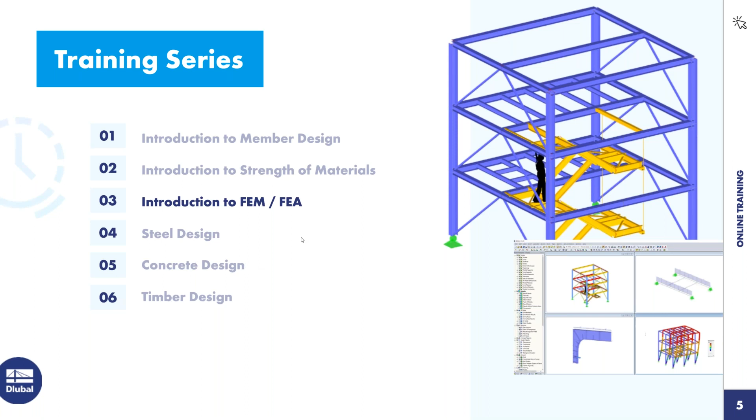We offer a plethora of webinars and training series for everyone. We are in our 3rd training series, and that is the Introduction to FEM - Finite Element Method, Finite Element Modeling, or Finite Element Analysis; there are many different explanations for the acronym. We've already had Introduction to Member Design and Strength of Materials, and then interesting topics are coming up: steel design, concrete design, and timber design.

Diving into a bit more detail of what we're going to look at today: the basic principles of finite element analysis, bridging the gap between the heavy technical things we learn at university, summarizing it and making it more understandable, and putting it into practical applications for what one has to consider when modeling in RFEM.

Then we will look at our first introductory example, which we can model together, and that is a continuous slab. We will look at different ways of modeling the slab and compare the results we get with what we expect from our basic principles of beam theory. Mentioning beam theory, we're also going to have a look at plate theory.

We'll then have a look at a couple of already predefined models, looking into nonlinear calculations, which won't require much following along. Afterwards, we'll end up looking at some singularities where everyone will be able to model along again.

So before we get into the basics of finite element analysis - we've already introduced ourselves - it might be nice to know a little bit more about where you guys come from. So I'm just going to start a poll, and you should see it now.

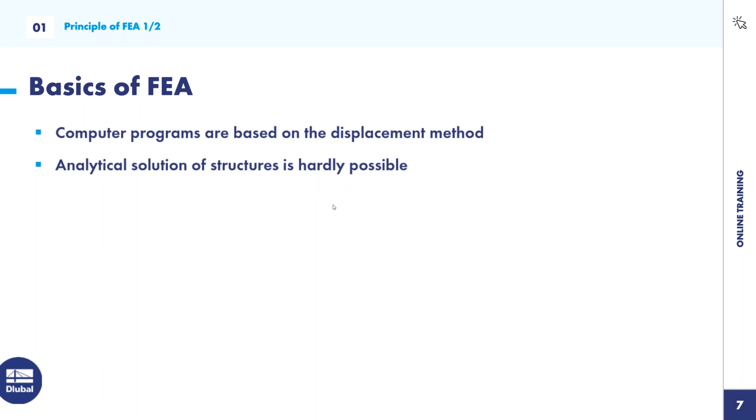Perfect. Thanks for that. So yeah, like I mentioned, we are based off the displacement method, which means we are solving for the unknown displacements, the deformations on the structure. From then to get the forces, it's a post-processing result. So that's how we get our stresses, our internal forces, etc. Our basic principles from what we learn at university, being analytical solutions, is quite hard when we extrapolate that onto bigger structures. And that's where we go into numerical solutions, and that's where the finite element analysis comes into play.

What we do is we take this real structure, a continuum, and we break it up into a mesh of finite elements. That's where the name comes from. And each of these elements are connected with one another. And it's that interconnection which is quite important, because when we come to assembling everything again, which is on the next slide, that's how we describe the structure as a whole and not just these individual pieces. The nodes are very important. All of our results are concentrated at the nodes, and then broadcasting that onto our whole problem is done through interpolation.

Mechanical behavior is described by approximation sets, and a very important part of the whole process is discretization. That's when we take the problem and break it up into smaller pieces, and we can describe the behavior of the smaller pieces quite accurately. Graphically, we start off with the structure as a whole, which might be quite challenging to describe. So then we cast a mesh over the entire structure, each mesh is the standard element, and we know the behavior of those elements. Then we transform the stiffness relations of each single element into the global picture, and that's how we can describe the whole structure. That's part of the assembly.

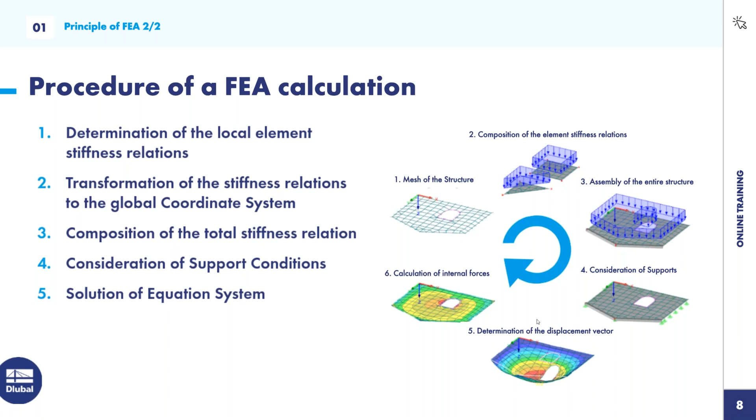The next step, which is very important, and that's quite often what happens when we have an error when running an analysis model, is getting the consideration of supports correct. Is our structure stable? Have we provided enough supports for the determination of the displacement vector to take place, which is what we call the solution of the equation system? And then as engineers, we want to work with bending moments, axial forces and stresses. To get there, it's part of the post-processing where we determine these forces, which is very useful when we come to designing.

That brings us to our first example, which is going to be a continuous beam or a continuous plate, a two-span beam or two-span plate. It's always better to learn through doing. In this example we want to cover the finite element mesh and the implications that the mesh size has on the convergence behavior of our results. We're going to be looking in detail at the hogging moments over the internal support. To validate our results, we'll look at what we expect, simplify it down to a single two-span beam, and look at how the different mesh sizes correlate and converge to what we deem to be the appropriate solution.

A few other things that we'll look at in RFEM is just how we can look at the distribution of internal forces. We'll then touch on the subject of shear stiffness and the consideration of shear stiffness when running analyses in RFEM 6. And then we can also look at result smoothing when it comes to interpreting the results a bit better. So I'm going to switch to RFEM now.

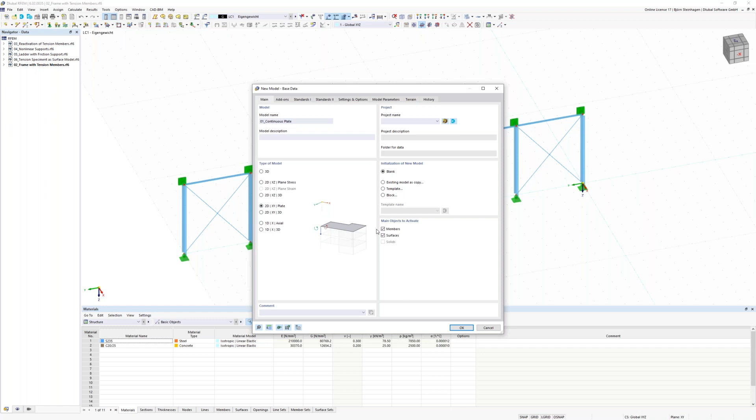So for the plate, we want to consider bending in both the X and the Y axis, and we will have deflections in the Z axis. So we're happy with this 2D XY plate. So I click on OK, and that will then generate a new model.

Since this is an international webinar, when it comes to language settings, we can go under options, program options, and under settings, you can have your language of choice. Also, when it comes to appearances, under display properties, you can toggle to a dark background if you'd like, but I prefer sticking to the white background. But again, it's just a matter of personal preference. So much for that.

So let's start off with modeling. What we want to define, going back to the presentation, is 4 surfaces. So we'll start off by just creating one surface and then copy them across. To do that quite simply, we can go up to new rectangular surface. And since we are in the structural engineering domain, we don't just look at geometry. Geometry has meaning to us, which means geometry has a depth, and that depth, that thickness, is assigned a material. And that's exactly what we want to do here.

So for this example, we're going to have a thickness of, let's say, 300 millimeters. So we will create a new thickness. And like I said, each thickness has a material, so we can go into the material library. As you can see, there's quite a few materials to choose from, which might be a bit overwhelming. One can also search, which makes things a bit easier. So I want to go for a concrete material, just normal grade concrete, not lightweight concrete, and double click on C30/37.

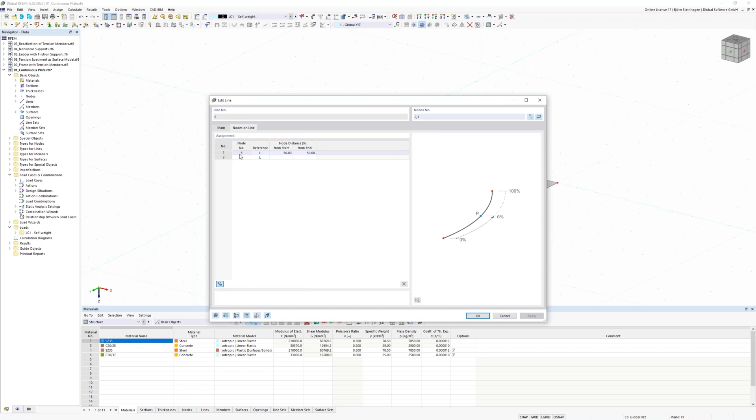And just to illustrate that further, if I now click on the line, it has a new tab called Nodes On Line. So it recognizes that node from the line that I just created, it belongs to it. So everything is nice and connected. The red nodes are just a standard node type. So there are different node types, and that's what the different colors mean.

We will now go on to supporting our structure. Obviously, no structure is complete without supports. So we'll start off on the left edge. And basically what we want is, like we know from our structural analysis lectures, we'll have a pin support here and then 2 roller supports on the interior support and on the far right. So there are lots of ways in RFEM to assign attributes. It can either be on this left navigation bar, it can be using these quick icons at the top, or by clicking on a line and right clicking for more options.

We'll start off with this option, assign line support, and a hinged support is what we want. So we want to assign that now to a line number. So we'll click on line number 1, click OK. Okay, and now we've assigned a line support to that first line. These 2 lines, we will have a roller support. So again, it's now realized that I've clicked on lines 3 and 5, and the line support type. The only 2 options we have here are hinged and rigid, and that's not what we want.

So we want to look at having a new line support. So I go create new line support. And there are some presets at the bottom. I can either define things manually, or I can use the preset, which is sliding in X, and it knows what to do. So I click OK, and OK again, and then now we have our supports.

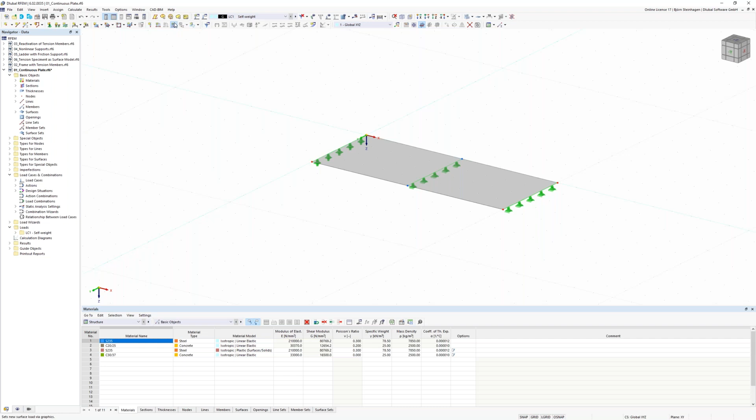I'll click OK. And now when it comes to assigning a surface load, you can just say new surface load, and we'll make it a magnitude of 10 kilonewtons per square meter. We want to assign it to our surface, which is surface number 1, and we click OK. And OK again, and then there we see our surface load. We can also adjust certain settings. If we don't like the size of it, you can right click on the load, make it smaller or bigger, depending on how you'd like to view the model.

For surfaces, an important consideration, as mentioned, and the aim of this example, is to look at the different mesh sizes and the influence that mesh size has on our results. If we didn't do anything with the mesh sizes, then the elements would take over a default mesh size, and we can see that by going under Calculate and under Mesh Settings. And this is, in general, what will be applied to a surface if we don't tell RFEM what to do.

We want to be a bit fancier in our example, and we will then assign different mesh sizes for the different plates that we create. So one way of doing that is under Types for Surfaces, Surface Mesh Refinements. We can right click and say New Surface Mesh Refinement. And in the PowerPoint, which I just showed, we had 4 different surfaces. So I will create 4 copies and assign different mesh sizes of 2 meters, 1 meter, 0.5, I think would be good, and 0.1.

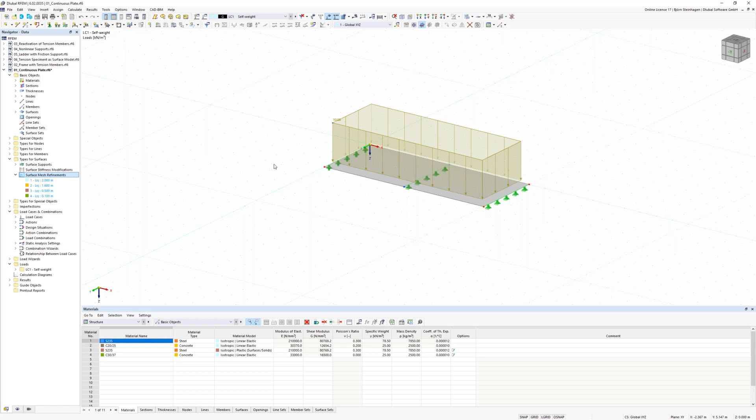Obviously, we need to create a copy of this plate before we can assign it to different surfaces. So that is quite easy to do. I just select everything. I go right click, copy, and we want to create 3 copies so that we have 4 in total, and that length is 10 meters. So I'll make a displacement vector of x is equal to 11 meters. So we have 1 meter between each model. I click on OK, and then there we can see our 4 different surfaces.

You'll also notice that it's now going out of the default grid plane. We can change that quite neatly by right-clicking on the canvas and going work plane, grid or snap, and we can make it dynamically adjust according to the size of our model.

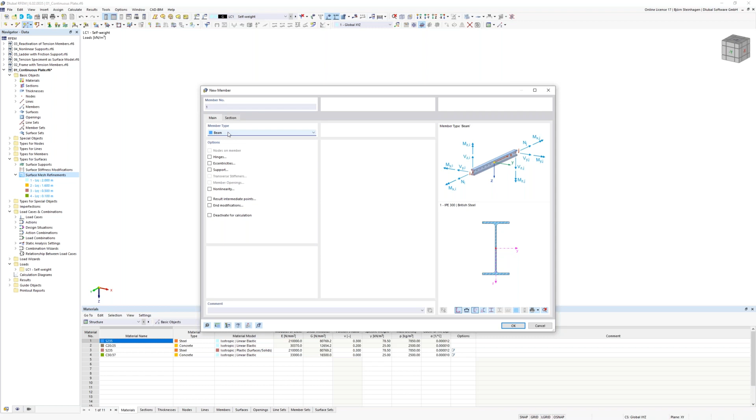Right, so we've created the copy, and now we want to also have a beam element for us to justify or quantify our results and to further analyze the convergence behavior. In order to do that, similar to how we created a new surface, we create a new beam member. So we don't need to change anything here. We just want to assign the section. The standard or the default is a steel section, and that's not what we will use for this example. We want to create a concrete member which resembles a meter strip of what we're doing with the surfaces.

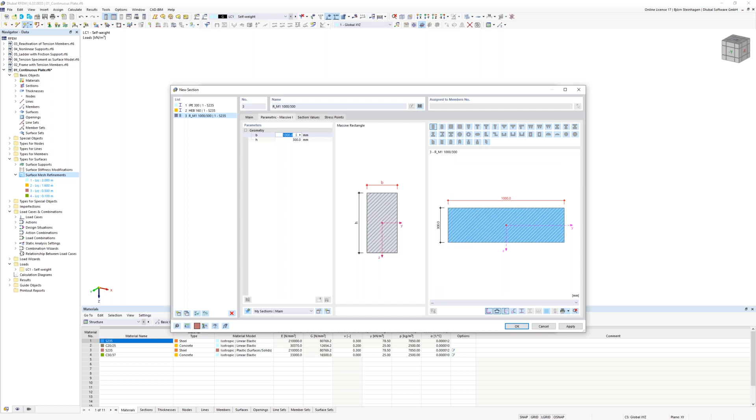So under the import section library, under the massive tab, we can just get a standard rectangle. The breadth, as I mentioned, we want to look at a meter width. So we assign the breadth of 1 meter, and the depth of our slab needs to be the same as the depth of the beam that we are modeling. So we'll make that 300 as well. Then the material should also be the same as what we're using for our surfaces. So we'll assign the C30/37. And I think that is all.

Yeah, so now we're ready to draw the beam. We can snap it to the middle, and the length should be 10 meters. And we can just do that by typing in 10, and you'll see on the member length dialog that adjusts accordingly. So there we have our reference beam element.

We can now look at the mesh assignments. It's a bit hard to see the meshes if we have the loads on, so we can deactivate the loads just by toggling off the show loads. Then going back into our mesh refinements, if I double click there, we can actually start giving it some values. The first mesh size is not assigned to a surface, and we want to assign that to our first surface. Click OK and click apply.

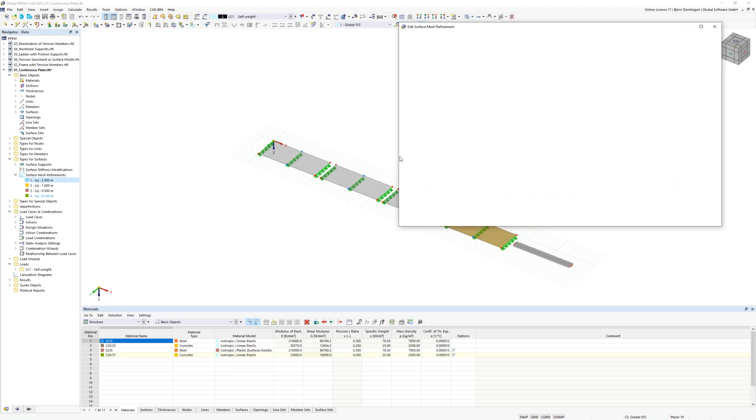Same for our second surface. And apply. And for our third as well. And we do the same for our last surface. So we don't see anything yet, which might be a little bit confusing. In order to see the different meshes, that is part of the calculation step of RFEM. So we can do that beforehand, and we can say generate mesh.

And here we can see our different meshes. So on the left, we have that mesh size of 2 meters, and that is very coarse. And then we have 1 meter, which looks a bit better, or was it 1.6, I think it was. Then 0.5, that's looking quite nice. And then we have a very fine mesh of 0.1.

We can see that. And then the final thing that we want to do is now we need to support our beam because this model will not run. As you know, as engineers, we need to add supports to make the model meaningful. So we will need nodal supports in this case. So I click on the node and I make it the same conditions as what I'm giving for the plate. So we have a hinged support on the left.

We need to now create a node in the middle, similarly to how we created a line for the surfaces. So in order to do that, I can right click on the member. And under members, I can say divide member by a number of intermediate nodes. We only want one intermediate node, and let's create the node without actually dividing the member. So I click on OK.

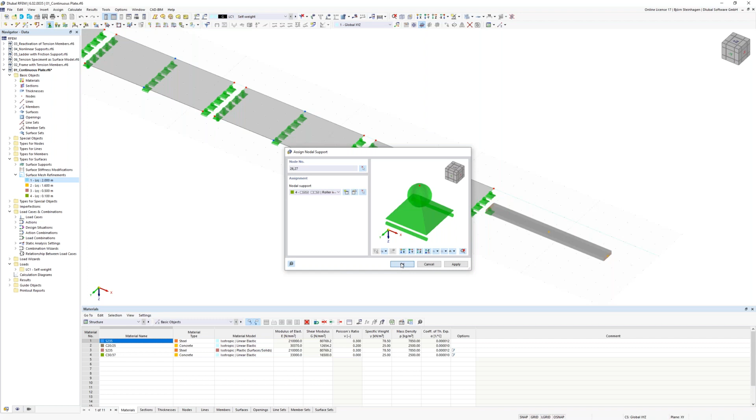And then there we have our intermediate node, and it'll have the same support conditions as the end node. So let me just select those and assign nodal support. And we want a roller in the X direction. Let's just have a look at how that is defined. Yeah, looks good. I click on OK and OK again. And then there we have our reference beam member.

What we'd also like is to apply the same loading that we have on our beam member as we have on our surfaces. So in order to do that, I go to assign member load or new member load, and we give it a magnitude of 10 kilonewtons per meter. We click on assign to members and we put that on that member. Click OK, OK again, and then there we have our member.

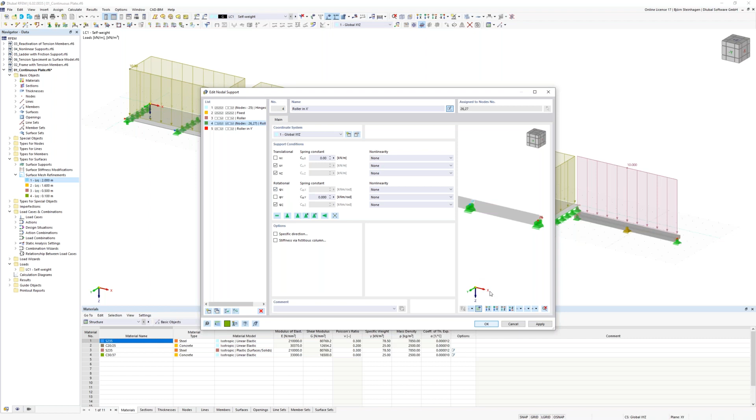Just going back to these support conditions, maybe it's just coming out of experience, but we would like to also make sure that the member is not free to rotate about its own axis. So we just make sure that the rotational restraint by X, so the rotation about its own axis, is restrained. Click on OK, and then there we have it. I think that is enough now to run some calculations. So under calculate, I go to calculate all. Let's see.

Before we go into the results, Ismail, do we have any open questions, or how's the pace for everyone? So far, so good, Björn. All questions are being taken care of.

I just wanted to name a few things, just so our audience can have a pretty good idea about how RFEM is different from the other competitors in the field of building information modeling. In this context, you were showing the surfaces, and just in case you did not take part in the other online trainings where we talk about the different features in RFEM, I just wanted you to show them how to render the surfaces as actual surfaces with their thickness, because it's all possible under the visibility navigator. What is it called again, Björn?

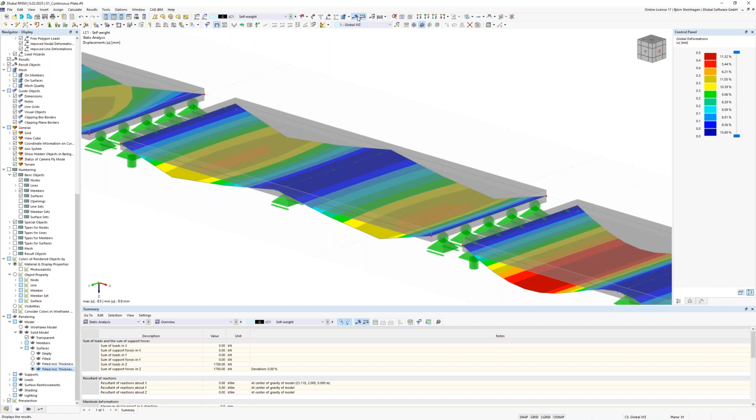The display navigator, and you can choose whether you want to see the surfaces including thickness or including lines and everything. It's a little bit down under rendering. There you go, rendering model, right under that one. You got rendering model, surfaces, solid model. Under solid model, you find surfaces, and you can choose whether you want to render it in a way that shows their thickness or not. So if you wondered why we are looking at surfaces that look like actual two-dimensional surfaces, no, they're not. It's just the way we render them, and that's one thing you can change whenever you want in RFEM.

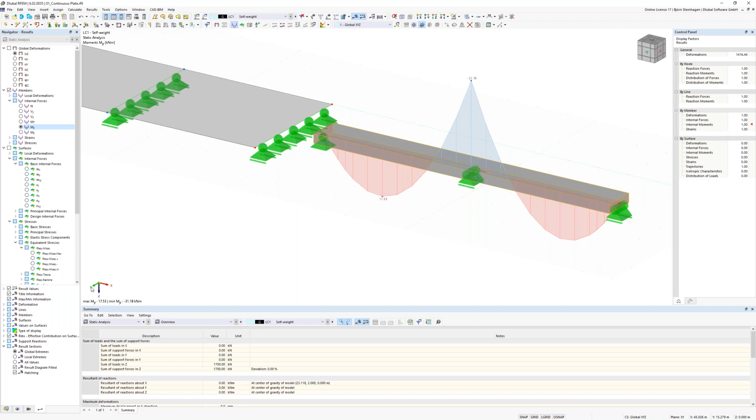So we can right click on the member and say local axis systems on, and we can see that green is for y, pointing that way. The support is hiding it a little bit, but it means we have the bending moment about the y-axis. It's just a coincidence that this matches the global axis right now - if I had drawn the member perpendicular, the local axis would point in the same direction as the global x. So it's always important to look at the local member axis when interpreting results.

Obviously this is quite a simple example, so we know that MY makes sense. For surfaces, it's a little bit different - it is not a bending about an axis, but along the axis. So for surfaces we want to look at our internal forces.

Now the contour plot might be a little bit hard to interpret. A very neat way to look at the results better is with a result section. We can draw a result section quite easily with 2 clicks - taking it from the middle of the surface and drawing it right across to the middle of the other end, then click OK. Now we have results we can compare quite nicely with our beam example.

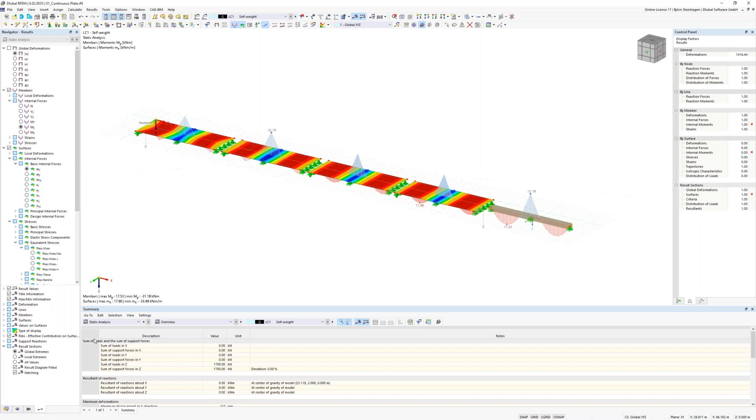I want to switch on local extremes, so it gives me all of the results. And here we can see a bit of a different behavior for the different members, for the different surfaces with different mesh sizes.

Going back to what we are wanting to expect, we wanted something along the lines of 31.18, and we see with the coarse mesh we start off at 26.38. Let me switch on the mesh sizes again and the loads. There we go. We see for coarse mesh we are probably underestimating it, and as the mesh gets finer, the closer we get to the reality of 31.18.

The take-home message here is you want your mesh to be as fine as necessary, but as rough as possible. If you have a very fine mesh, that has an influence on the computational time needed by RFEM. So again, we want it as fine as necessary, but not too fine - it must stay as rough as possible so we have that trade-off between computational efficiency and realistic results.

Again, finer mesh doesn't always lead to more accurate results. We also want to place our finite element nodes strategically, at points of extreme values or at design points.

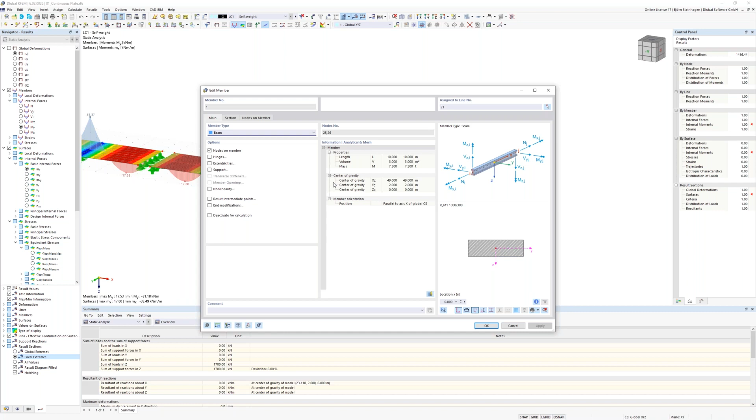So we can simulate that by going onto our section and edit section at member start. Here quite neatly we have an option to deactivate shear stiffness. So if I click on that and click OK, we need to run the results again. We click OK. Let me make sure self-weight is off, and just to make it run a bit quicker, I'll take off our design situations. I'll say OK, and calculate all.

We should expect a different value for our hogging moment now over the beam. And there we get 31.25. If we take 0.125 multiplied by our distributed load of 10 multiplied by 5 squared, we get 31.25. That's exactly what we see now for our beam after we've changed the settings of the member to not take into account shear stiffness.

Just jumping back to our presentation now. We've now run through this example. We have an understanding or a feel for how different mesh sizes affect the convergence behavior. We looked at the comparison between the beam and the surface elements, and we mentioned the shear stiffnesses.

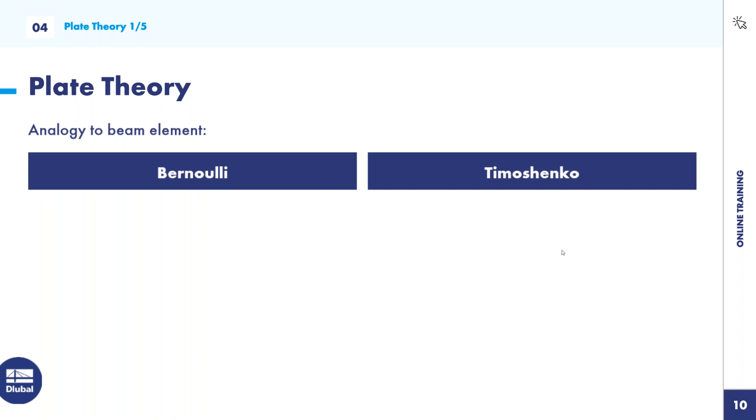Before we go into the plate theories and the different types of plate theories, we mentioned this with the Bernoulli beam. We have two types of beam theories or beam elements: the Bernoulli beam and the Timoshenko beam. I think we are very much comfortable with the Bernoulli beam. As we've all heard many times before, plane sections remain plane and the directors remain perpendicular to the member axis or the central axis. Because of that, we have no consideration of the shear deformations. There's a rigid shear stiffness.

On the other hand, the Timoshenko beam, otherwise known as the deep beam - we say the cross section remains plane, there's no distortion in that regard, but the directors do not remain perpendicular to the member axis, and we get this additional rotation, known as shear deformation. So here we have the consideration of shear deformations, and the shear stiffness is limited, which means it isn't rigid.

A little description of that: here we can see that these directors for the Bernoulli beam are initially perpendicular to that dotted line. With the deformation, it remains perpendicular. With the Timoshenko beam, the dotted line shows what the Bernoulli beam would do. Here we have something different, and we have this shear deformation.

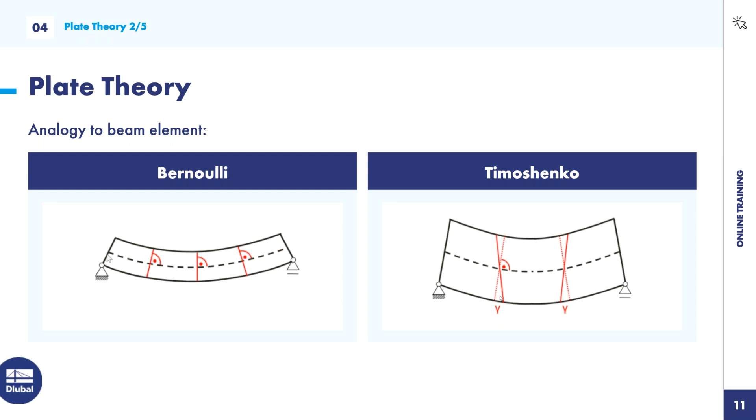That is then transferred to our beam theory, our plate theory. Plate theory was a further evolution of what was done for beam theory. The Kirchhoff plate is analogous to our Bernoulli beam. So we take on a certain number of assumptions: geometrically linear elastic material, cross sections remain flat, and we have no consideration of shear deformations.

The Reissner-Mindlin plate theory is equivalent to our Timoshenko, which is our deep beam. And here we have a consideration of the shear deformation.

Where do we see what happens in RFEM? Jumping back to RFEM, if I go on my data navigator on the left, it is part of our static analysis settings under geometrically linear. I go under edit. Under basic settings, I see that we have the plate bending theory of Reissner-Mindlin, which is equivalent to our Timoshenko beam theory.

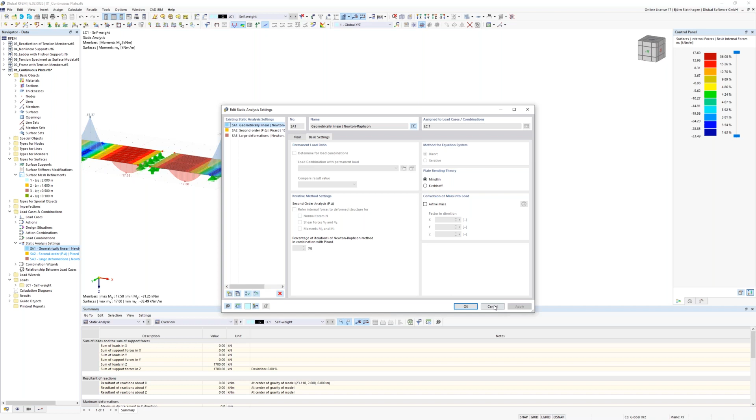I think that is enough before we have a short little break. But before we go into the break, I thought I would start a quick poll - just two questions, and this goes back to what we discussed about finite element analysis and finite element mesh. So the first question is, what is meant by discretization? Only one answer is correct.

Just waiting for a few others. Might close the poll. All right, everyone's making this look far too easy. Yeah, everyone got it correct - it is the decomposition into finite elements, correct.

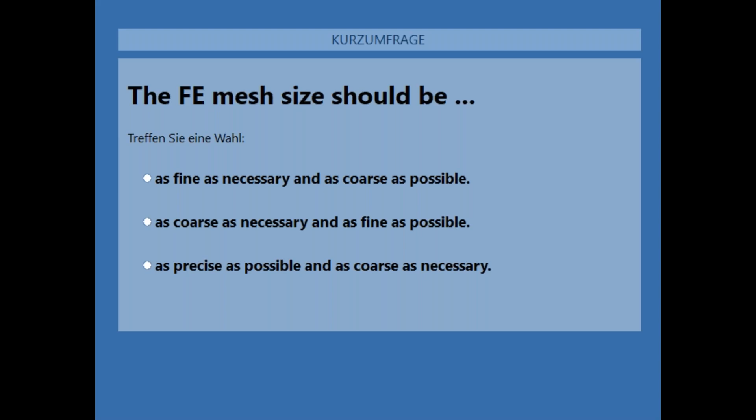I suppose the wording is a little bit trickier on this one. I'll just close the poll. So what we're looking for is that it should be as fine as necessary and as coarse as possible. Let me close that now. I should see my screen. Yep, sorry, let me go.

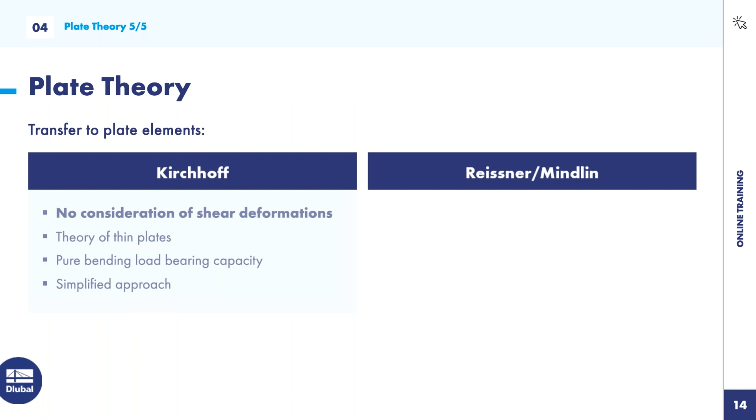I think we can go into a short 10-minute coffee break. Ismail, are there maybe any unanswered questions or any remarks from your side? You're doing it great, Björn. Everything's clear so far, and questions are being taken care of. I think we can go into the break. Awesome, so I have 10 to 5 my side. We'll be back at 5 o'clock, so in 10 minutes.

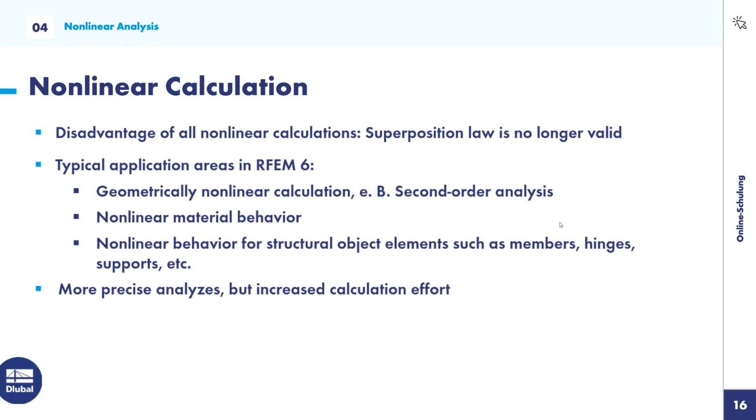Elements such as members, hinges, or supports—bracing jumps to mind when we talk about non-linear behavior of members, of elements. One can say it is a more precise analysis, but this comes with increased calculation effort. Again, it's up to our engineering judgment if we want to step into this non-linear world. There are places where there is no question, one has to do it, and that's where we'll go into some of these examples.

So I'll just close this continuous plate example, which we started with, and wait for that to close. Our first example is a frame with tension members. This is quite common in our steel structures—if you think of a steel hall or a storage facility, this is quite common. And just as a reminder, I think you guys can just follow along and watch, because I have these models already predefined, it would be quite hard to try and model along at the same time.

So if we can imagine a building bay out of a large steel structure, this needs some sort of lateral restraint. And if our given conditions are just pin supports at the bottom, our lateral loads could be something like wind. Wind can act in all directions, so when we're looking purely in our YZ plane, we'll have wind acting in our negative Y as well as in our positive Y.

This then, we're talking about the topics in lateral stability. So if I take away our bracing and we try and run this model, we should get an error, and we do. Some errors and warnings occur during the calculation. If we just click on OK, it will automatically jump to our errors and warnings box, and we can get a better idea of what went wrong.

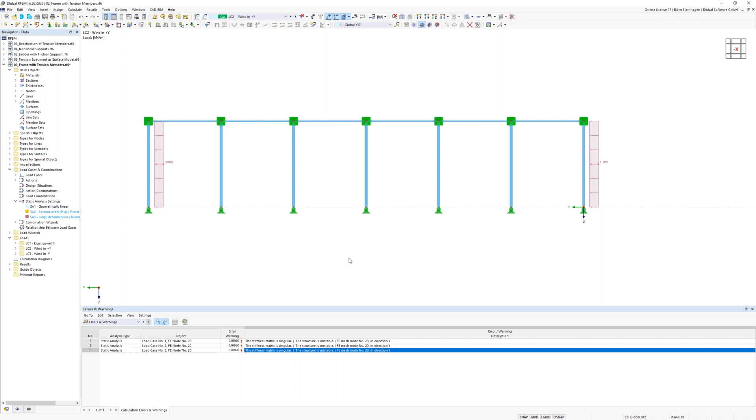The stiffness matrix is singular. It's something that you will get faced with, or happened to me quite a bit, is this error warning. And the first thing one should think about is always having a look at your support conditions as well as whether the structure is stable. And in this case, because I deleted the bracing members, the structure is not stable.

So how one can include bracing members is it is a type of member. Typically, when we talk about bracing, that could be equal angles or circular rods. I've predefined a rod here of diameter 20 millimeters. And we can draw that now. Let's not auto connect. So draw that from one node to the other. Yes. And from there to there.

Ismail did mention something earlier about the efforts with Dlubal and RFEM and how it's really taking on this idea of BIM and integrating a bit more parameterization and interoperability and ease of use in the graphic user interface. And one can see that with drag and drop, which is quite cool. If I select the two members, I can click and drag and drop. Sorry, I should hold control. Drag and drop. It's obviously not working now. As presenter, I can draw it manually.

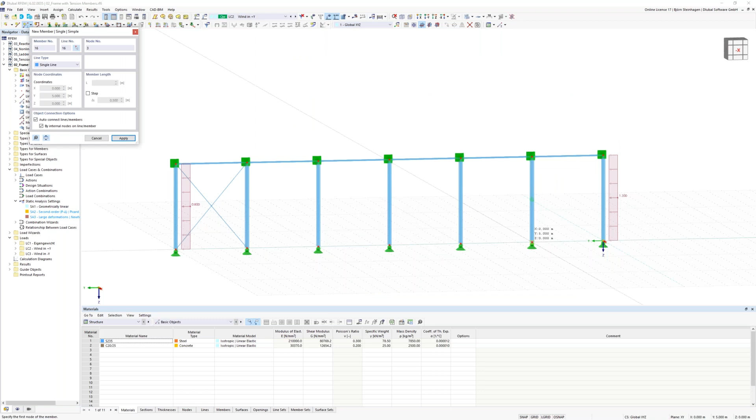So we get the section for a 20 millimeter diameter rod from node to node. Not auto connect. The reason why I say not auto connect is because with the intelligence of RFEM, it'll break up this member where it intersects with this rod and add a node there, which is usually very useful. But that's not what we want in this case, because in reality two rod members will run past each other. So that's why I deselected that option. So now we have our bracing members, and if I run this now, it should converge.

And it does. Now, just because it converges doesn't mean that everything's good. If we now switch off our global deformations and look at the behavior of our bracing rods, which you can think of as a wire, very good in tension but with almost no compressive resistance, and look at the axial forces, we'll see red for tension, and we'll have compression in the other rod, which is something that we don't want. This is an example of non-linearity, because we need to see how the structure behaves, and then the member type needs to react appropriately.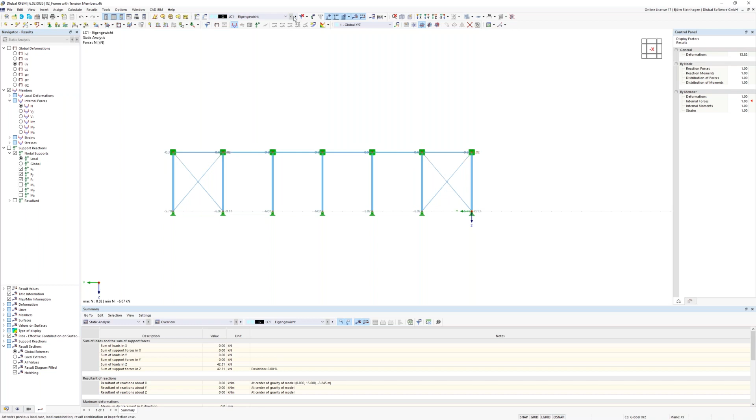So we don't want compression going into our bracing members, and there's a couple of ways that we can do that. Just for interest sake, if I toggle to wind in the other direction, we now have the reverse. So we have tension in that member, which means we need both members in our model, but defined in such a way that it is activated in tension and deactivated in compression. This is a type of nonlinearity which we can quite easily define. There are many different ways of defining it in RFEM.

So the first of which is I can select the 4 different members and double click on them, and say we want a nonlinearity. As soon as I click on nonlinearity, an extra tab pops up. There I have member nonlinearity options, such as failure under compression, and that's exactly what we want. This is the nice thing with RFEM, there's a lot of different presets. I won't go through all of them, but failure under compression fits our scenario perfectly. So we click on OK. Our definitions changed, so we must recalculate our model.

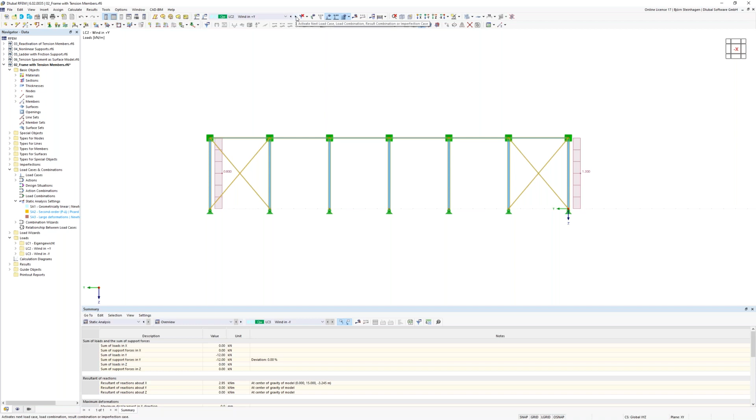So if I click on OK, and yes, I want to start the calculation, we'll see a difference in the axial forces of our members. And that's exactly what we want. Here we see wind acting in the negative y direction, so from left to right across the screen. And we see only tension, and this member has been deactivated. And we see the results for that load case.

We see the opposite. As I mentioned, there are many different ways that we can define this. So what we had was, let me select those bracing members. It is assigned to a member type beam, but there's a lot of flexibility and ease of use with RFEM. If I go on the drop-down menu, there are many different member types.

So it actually takes a lot of this clicking and nonlinearity defining work away from us, obviously in a good way. So we can change the member type to tension. And then you see the nonlinearity tab is grayed out because this is a preset, a default for bracing. And if I click on OK and run the analysis again, it'll give us the exact same results, but there are just many ways to achieve what you want to do in RFEM.

So again, the axial load is the same as what we had when we had defined it with a nonlinearity for a beam member. So much to that example. Ismail, are there any comments or questions after that one?

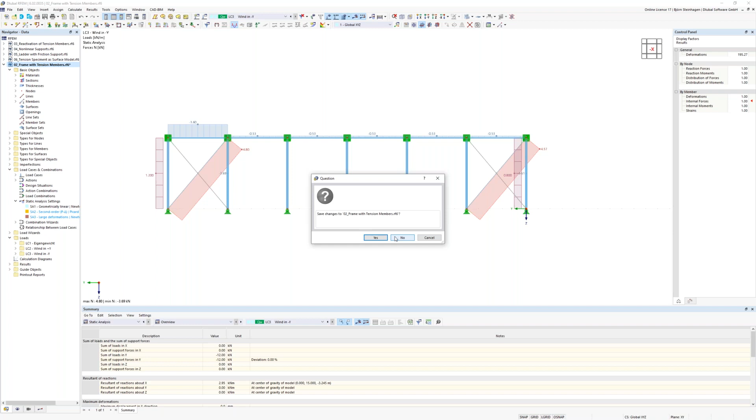Thanks for that, Ismail. Right, looking at our third example, similar to what we're doing in the second example with tension members, we're looking at the reactivation of bracing members. So once again, if I remove these elements and I try and run the model, irrespective of the nature of loading that we have, we need to have an adequately stable structure. So that includes proper support reactions defined, as well as a good structural concept.

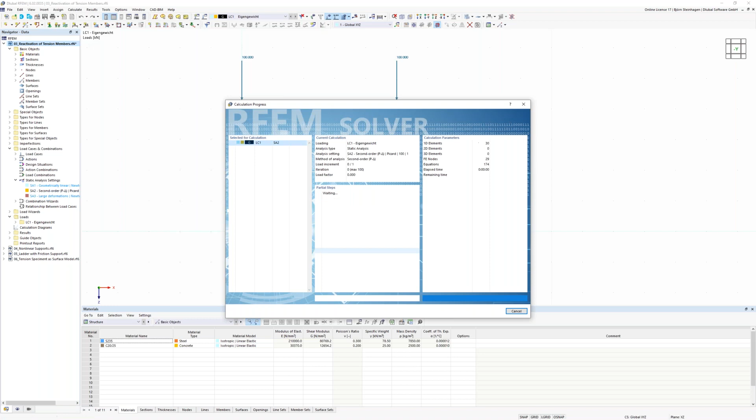Obviously we get the stiffness matrix singular issue, the structure is unstable. We get these types of examples from our statics lectures. So if I just undo that and I add the bracing back, we can now run this model. Again, stiffness matrix is singular, and that's because of the type of analysis settings we are now looking at. We are looking at a second order analysis, which is getting the equilibrium on the deformed configuration of the structure.

Reactivation is what is important to consider for this example. Let me close this and go back to our definition of the bracing member. We have a tension only member for our bracing. So we get this compressive axial load acting on our columns. They deflect accordingly and they shorten. When they shorten, these bracing members will shorten as well, meaning that they'll also be in compression. Because they're in compression, they will be deactivated, which means they will not be contributing to the stiffness of the structure. That's why we have this instability error.

There's a way to change the algorithm for the solving in the second order analysis, and that has to do with reactivation. Basically, reactivation will do the first iteration step. It won't ignore all of the members in tension. What it will actually do is take the tension member with the greatest compressive force, remove it, and keep the other member.

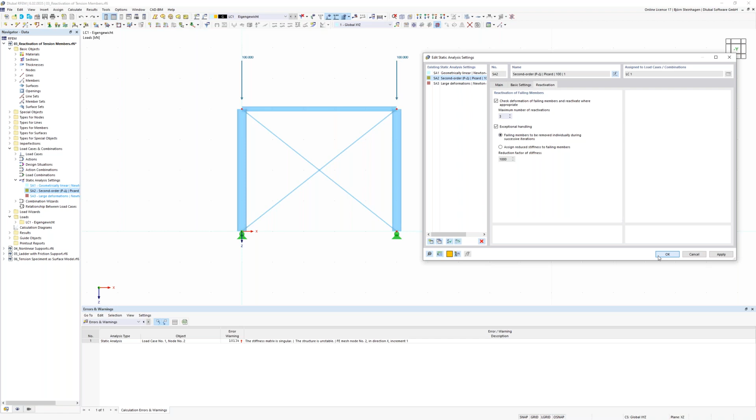So if I then say, check deformation of failing members and reactivate where appropriate, and we have exceptional handling for failing members to be removed individually. So the one with the highest compression force will be removed, but not all of them. If I accept these new analysis settings and calculate all, we now have convergence for the second order analysis. And we see that the member running from bottom left to top right is deactivated, where the other one has remained and is now in tension.

So much to that example. The next example has got to do with non-linear supports, which is quite interesting. So let me just close this.

So, quite an interesting example. We learn a lot of standard support types in our lectures. We have our fixed support, our roller, our pin support. Unfortunately, in practice, it's quite often not that simple.

Whatever it may be, strange requests from the architect or difficult building conditions, working on an existing site, you may not be able to get exactly what you want in terms of support conditions, and you have to adapt your model appropriately. So that's what we're looking at doing here.

Let's consider that we have this L-shaped steel structure, and the support conditions here are such that there's maybe a wall that the member butts up against, and it is resting maybe on a smooth surface. Let's say, for argument's sake, that there's little to no coefficient of friction that that smooth surface provides.

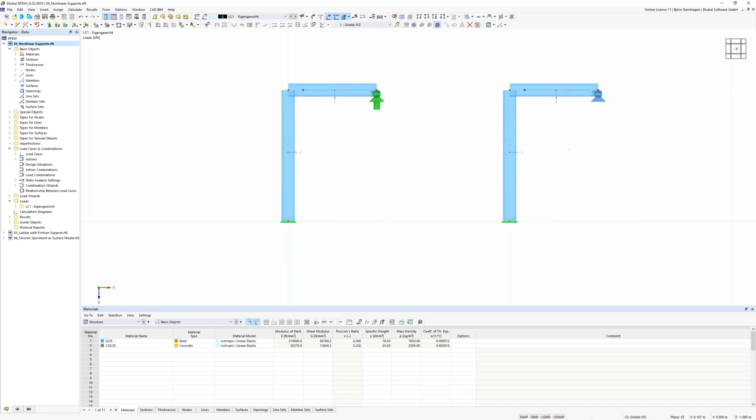It might sound a little bit complicated to try and model that interactively, but that's where RFEM has got some very nice and easy to use definitions. So we can see I've applied a load from right to left, which means that the structure should slide, and that is what is done if we don't have this flexibility in support conditions.

And if I open up this nodal support, which is theoretically our behavior on site, we can see a nonlinearity function for translation in the X direction. And that is failure if the applied load is in the negative X direction.

And that again is a nice thing with RFEM. There are so many easy to use presets that one can just pick, and one can also define things manually if one wants to. So I'm happy with that, because this model has already been created. And just to show the difference in behavior, we have global deformations for the structure on the right that is deflecting, whereas the one on the left is not at all.

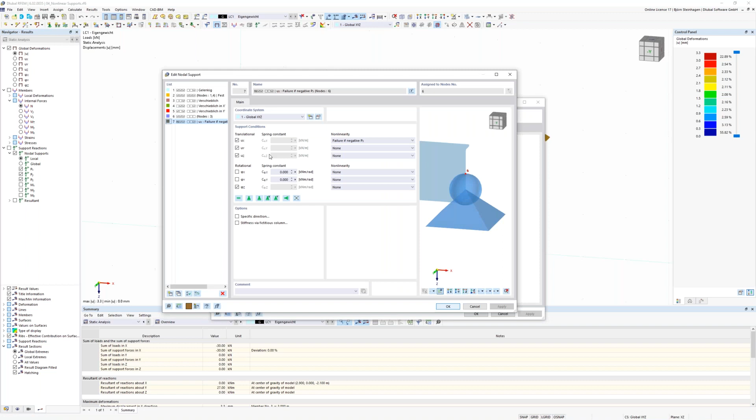And this type of support condition, which we saw when activating the properties, is defined as a nonlinearity. And it is exactly that, because we need to first see how the structure responds before we can apply these adapted boundary conditions. So much for that example.

Ismail, any comments or further questions or something in the chat? I'm just enjoying how perfectly clear you're making this look. Yeah, no questions so far. Cool.

Well, if you enjoyed those examples, hopefully you'll enjoy this next one. It's quite an interesting one. Consider we have a ladder that is propped up against a wall. Anyone who's worked on a ladder before knows that you basically prop the ladder up against something, and you usually get someone to support it at the base so it doesn't slip out from underneath you. We can actually model that with appropriate support conditions.

So we can see this 1 kilonewton load applied in the center of these ladder rungs, and we can define it such that the person is moving up the ladder, which is quite cool. Sorry, getting distracted by the little animation. That is cool, you're right.

Thank you. So what we want to see is at which point, if any, the ladder is going to slip out from underneath you, assuming a 1 kilonewton load. So it's a decent sized human, and we can look at our support conditions now for that.

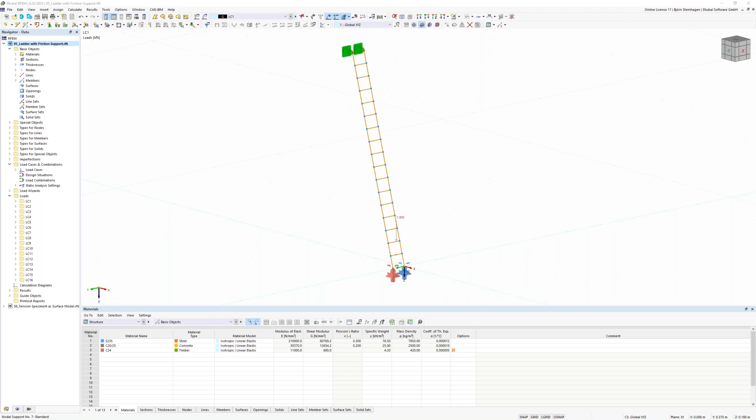So if I double click here and open up the properties again, we have a nonlinearity in the X and Y direction. It should be clear that in the Z direction, we're always going to get a support reaction. It's just what is applied down will be what is going up.

But for the X and Y directions, we have this friction, and the friction is a nonlinearity. So if I have none, then you'll see the UX tab disappear. But if I say friction PZ, we then get a UX friction PZ tab. So if I look here, there's only one input, which is a friction coefficient of 0.2.

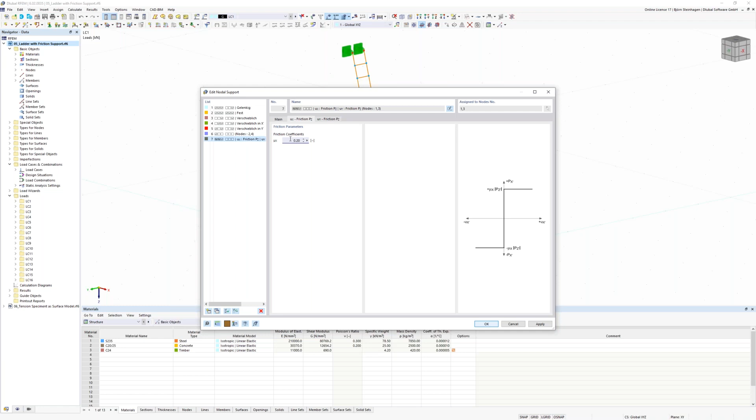Now, as we know from our first introduction lectures in physics, we take a coefficient of friction, we multiply that by a normal force acting perpendicular to the surface, and that's the drag that you'll get, and that's what we want to consider in this example. So we can straight off the bat say that we have a friction coefficient of 0.2.

If our applied force is such that this coefficient of friction is maximally utilized, then the ladder will slide. So if I bring up a view like that, we can see that that force is acting vertically down, but it's traveling down to the base through this inclined ladder, which means it's acting at an angle. And obviously our reaction forces now will be resolved into X and Z components.

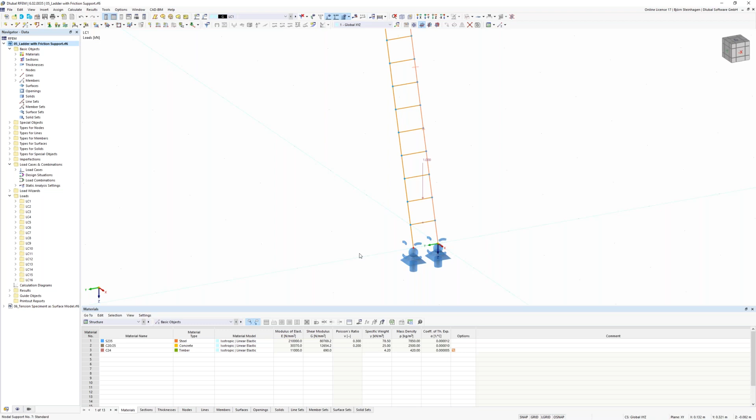So basically, if we take 1 kilonewton, it's applied centrally on the ladder. So in each beam, I'm not sure what the technical term is for a ladder, but each side of the ladder will be 0.5 kilonewtons as a vertical reaction, just from simple statics. Now, if we take the 0.5 and we multiply that by a coefficient of friction of 0.2, the maximum resistance that this configuration can provide is 0.1 kilonewtons, if I'm not mistaken. So let's just remember 0.1 kilonewtons in the back of our mind.

And if I now calculate this situation, we get some errors, which means that somewhere the ladder is going to slide away from underneath us. So let's have a look at where that occurs. Here you'll see the vertical reactions, and that can be activated. It is already done now, but it's under your results navigator, support reactions. And here let's just have a look at X and Z, so taking off Y.

And so we have, when the person steps on the ladder in the first rung, a horizontal reaction of 0.01, so nowhere near the maximum resistance that our setup can provide. We start moving up the ladder, and it's starting to increase, 0.06, 0.08, 0.09, and then that's our 0.1, which is our limit value, and you can see the ladder now slides away.

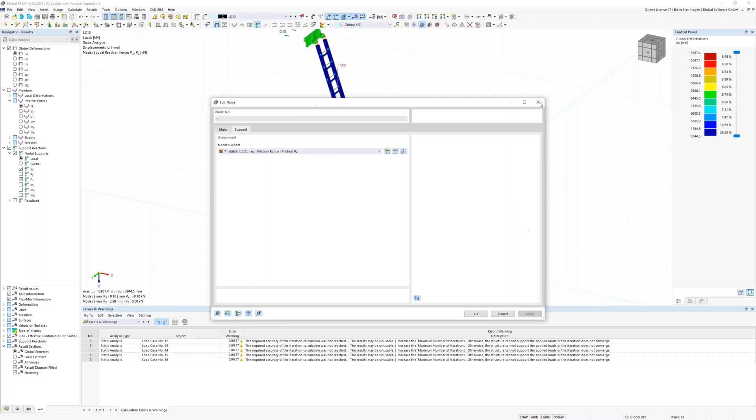I think it was quite a complicated example if you think about it, but with RFEM 6 it's quite easy to define. As you can see, for the support reactions, for this complex non-linearity, it's just one box which one needs to define. So much to that example. We can now move on to...

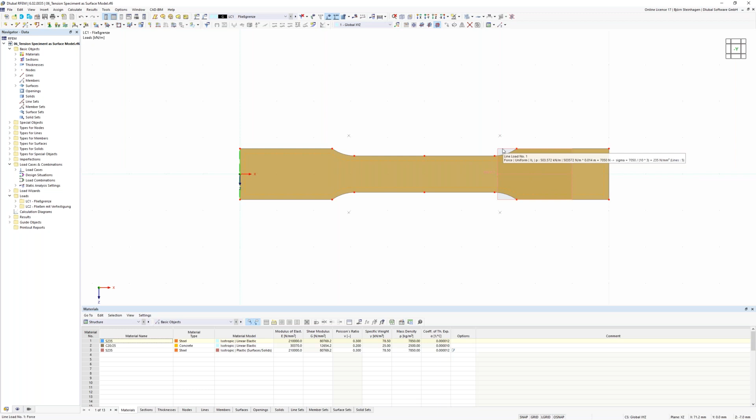If we want to look at that, we have here a wishbone type steel surface predefined, and we have a line load applied to the end. If I just zoom around a little bit, you'll see fixed supports there. So we expect that the structure is going to deform to the right. We have applied a load of 503.572 kilonewton per meter, which is probably at face value quite a strange number for me to input, but we have some method to the madness, and that is that, starting from right to left, it's basically solving for the force required in order to achieve yield on this surface.

So we're using a steel material with a yield strength of 235 MPa, or newtons per millimeter squared. Obviously, with our basic formula of stress is equal to force over area, we can calculate the required force by taking this yield stress and multiplying it by the area. So the question is, what area do we want to use? We want to get yielding across this smaller section.

So the dimension from that node, which is at 50 millimeters, to that node, which is also at 50. Sorry, we should be looking at the Z, my bad. So 5 millimeters at the Z and -5 at that Z. So the distance between those two is 10 millimeters. We've also defined a linear elastic material, and 3 millimeters is the thickness of that plate.

So going back to this, in order to calculate the force required, we take the 235 MPa, multiply that by 10 times 3, and we get that 7,050. We then want to distribute that over the width of our surface at this point, preferably not a concentrated point load. We'll get into that in the next portion, which is on singularities.

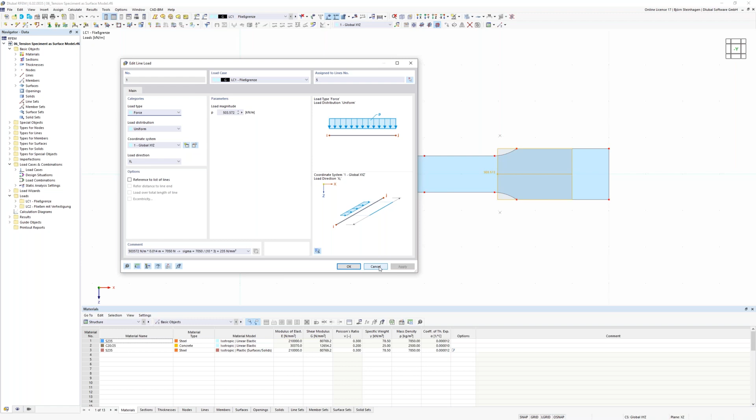503.572 kilonewtons per meter. As I mentioned, we're starting off with an isotropic linear elastic material. So we are assuming that we are still in the elastic portion, in elastic analysis, where the material conforms to Hooke's law. So just checking some things here. Yep, that's all good. So let's calculate all.

Right. So what do we see? What we usually get as default is the global deformations, which I mentioned. I'm not terribly interested in that for the meantime. I want to have a look at the stresses because we've applied a force which should backtrack to our theoretical yield stress. So under surfaces, under stresses, we have an equivalent stress formulation, where I've chosen the von Mises stress combination. That is a very typical stress combination to use.

It's basically the way you're getting a single value for stress, but stress acts in the principal directions. So how do you combine that to have a design value? Von Mises has a formula, and that is what we're using at the moment. So maximum von Mises stress. The contour plot I clicked on the bottom here, surface results. That is automatically generated between your minimum value and your maximum value.

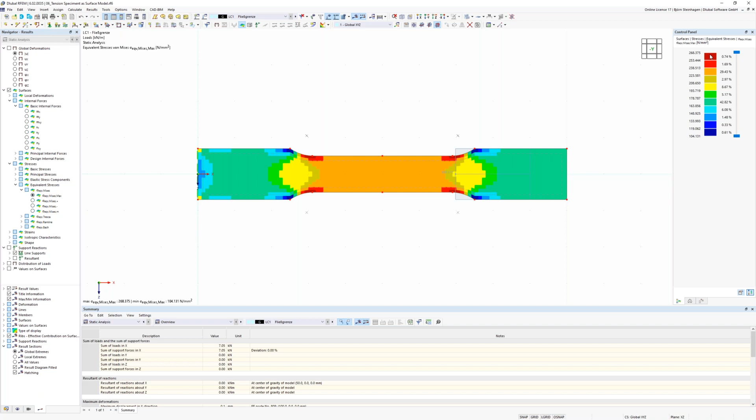So if you want to have a bit more control over what is happening, just first comment, we see that we get a maximum stress of 268 MPa, which is not what we expect, because we back calculated that it would reach yield stress across this portion, and we're getting something much higher than that. So if I double click on the contour plot and I limit it to 235 and I click OK, we get this arguably strange result on our surface plot.

What we do know and what we can say at face value is that we've now gone into the non-linear space. So we need to change our material appropriately to reflect that. One thing to mention on that point is that material nonlinearity is an add-on for RFEM 6. So if I right-click on my model and I go to base data, and on add-ons, we have this analysis add-on for nonlinear material behavior.

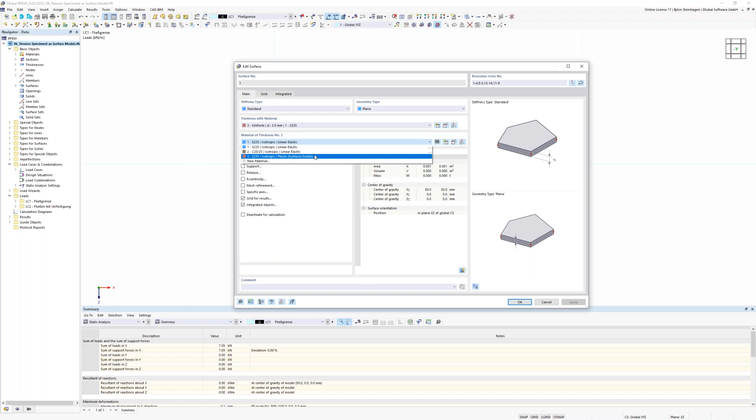I already have that checked, which means that, let me just deactivate results, when I open up my different material options, I have an isotropic plastic material. So plastic meaning we're now going beyond the linear assumptions. So isotropic plastic. And if I go into edit material just to look at what's happening, that material model has been chosen, and that is available to me now because I've activated that add-on for nonlinear material behavior.

Again, a lot of very handy presets that I can pick from, but isotropic plastic surface, that is perfect for my example. As I mentioned, we're looking at the von Mises stress, modulus of elasticity according to steel, and the yield strength for our material, which is the same as in compression and tension, has been selected.

So now we've changed the material model to represent our nonlinearity. Because we've changed our material, obviously the previous results don't apply anymore, which is that error that I got, or that pop-up that I just got now.

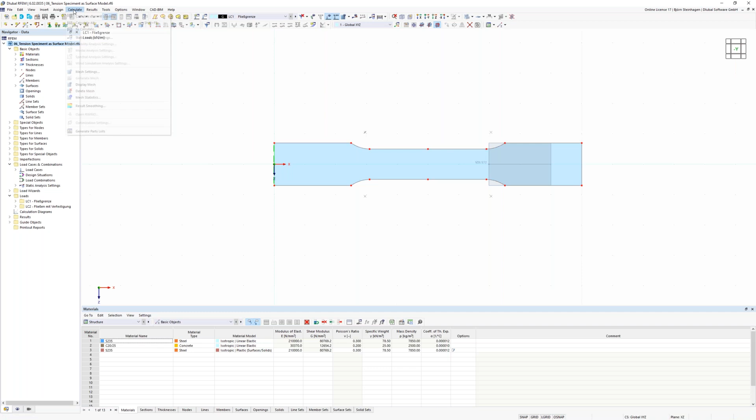So if I now go under calculate all with this non-linear material model, we see first of all that the convergence diagram looked a bit different. And we now have a maximum - sorry, let me now go on to maximum. I've not constrained the contour limits. I've said that it must tell me what the maximum and minimum stresses are in my model, and it is exactly 235.

Just a few remarks with regards to visualizing the equivalent stresses. You see it looks a bit pixelated. That has all got to do with how you want to view the results. So if I go under calculate, under results smoothing, we have different options. I think the standard is usually continuous within surface sets.

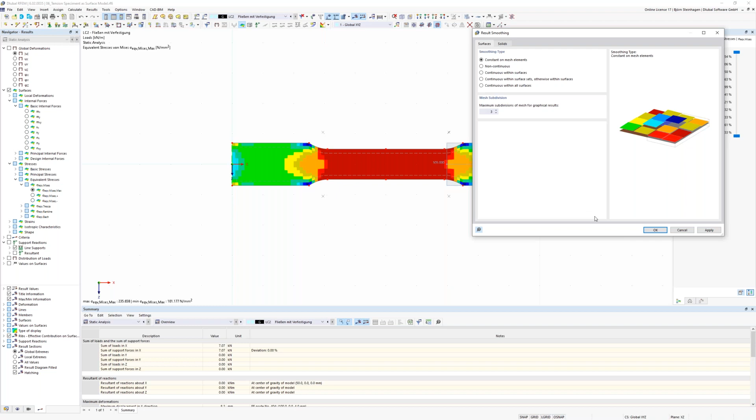So if you're looking over a very large domain, such as a large slab within a high-rise building, you might want to consider using that, where it will almost consider what is happening at neighboring surface elements and smooth it accordingly. But we're looking very detailed at a very small model - it's a 3 millimeter thick steel element, 10 millimeters width across there. So I really wanted to have a look at each individual surface result per element, which is also coming back to the mesh, how fine we have the mesh. So that's just a word to that.

Another thing to have a look at is if I look at my UX displacements and play the deflection shape, it gives a handy little animation to what is going on. And I can change that also for at the yield strength, and that's for uX and uY. Just switch off the results for the time being.

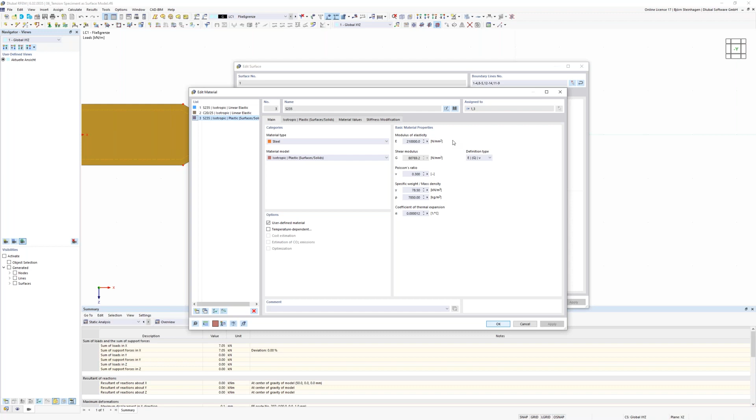There we go, just having a look again at the definition of our material. We have all of that, and that is the 235 MPa is what is reflected when we ran the nonlinearity, and that's what we want.

Ismail, any questions at that stage? No questions, but just one thing that I want to mention.

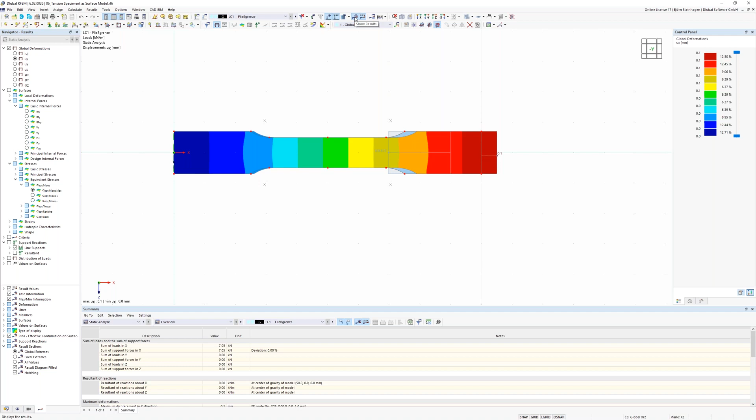What I personally love about RFEM are those little explanations next to each and every option you choose. If you go back to the window you just closed, it's just I think it's a privilege - I don't remember which one, but it's a general thing in RFEM. Each and every thing you apply to your structure, or you choose in those windows you use every once in a while in RFEM, you always have this little explanation on the side that tells you briefly what's everything about that you're about to do. So this is one thing that maybe some people might take for granted, but this is one thing that makes RFEM one of the most user-friendly softwares, because we actually care about providing a little explanation to those who are not sure whether that's the correct choice to make. So yeah, just a small remark.

Yeah, I've also found that very useful when also defining different standard types, so surfaces or beams, especially if I have a quick example with a beam member. A lot of these things as well - I'm not sure if that's what you're also referring to, Ismail - but if I go and toggle between the different members, it shows me the degrees of freedom. It shows me what axial load it's going to allow into the different member types, and that can be very helpful. Absolutely, yeah.

I think those are the nonlinearity examples that I brought along. We will then, as mentioned, go into singularities. But before we go into that, I thought I'd start another quick poll.

So the first question is, many answers can apply, and that is: which examples would be appropriate for a non-linearity calculation? Many, as mentioned, it's not just one answer that applies, there may be more.

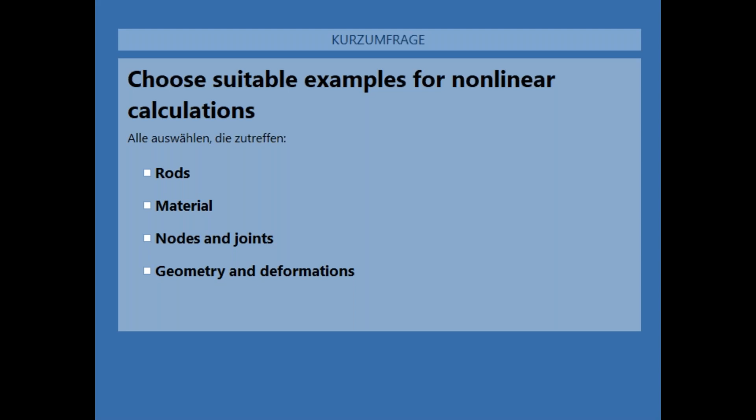Very, very good video, I can also recommend it. Thanks for mentioning that as well. Thank you, Björn. I think everyone's had enough time.

If I bring up the results, all scenarios actually apply for a nonlinear calculation. So you can have nonlinear material behavior, geometric nonlinear response, or nonlinear deformations. Rods, we mentioned earlier near the beginning with the different examples, where we had tension-only bracing members, as well as nodes and joints. For nodes, we looked at sliding and friction support conditions. So all of these options can apply in a nonlinearity scenario.

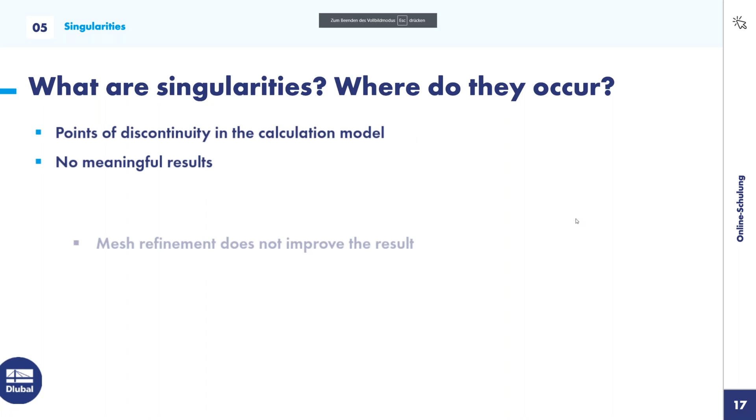Singularities, as I mentioned—jumping back to the presentation. So what are singularities? Where do they occur, and how do we go about not having them in our model? A singularity is a point of discontinuity in our calculation model. We can say, if we've identified it correctly, that it doesn't have a meaningful result. Just because we have an unfavorable result in our model doesn't mean it's not meaningful.

But if we've correctly identified a point of singularity, then yes, that is a result which is not meaningful. It is a model problem. Going back to what Ismail said, it's not a real occurrence—that doesn't happen in nature. It just has to do with the way we're modeling. It's also not an error in the software—it's just the incompatibility of certain conditions. Typically, we say a point of discontinuity is a point with infinite stresses and, conversely, internal forces.

Mesh refinement does not improve the result—this is a very important point to emphasize. In our first example, we changed the mesh size, made it finer and finer, and that refinement approached our expected result. Quite often people conclude that it doesn't matter, that making the mesh as fine as possible will always give correct results. That's where engineering judgment comes into play—it's not always the case. If you have a singularity in your model, mesh refinement will actually make the situation worse.

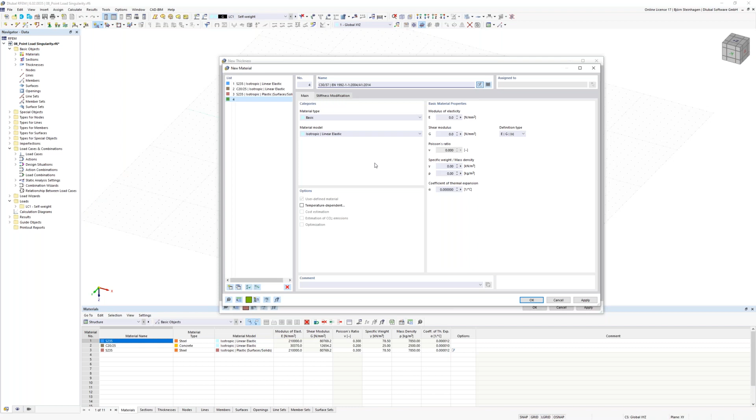The material I want to assign is concrete of grade 30, or C30/37. That isn't here, so I go to new material. It opens up the material library. I can filter by region, filter by material, search for the material, or I can quickly just search right here. If I type in C30/37, according to European standards, I can click on that and we have it defined. I click OK. So we have C30/37, thickness of 200 millimeters, exactly what I wanted for this example.

Click on OK. Again, change my work plane to the XY and click at the origin. I'd like, let's call it, 8 meters wide and 6 meters deep. And we've defined now that surface quite simply.

So we want to now look at the singularity assigned with a nodal load. Let's create a node just in the center of our model. I think that would be about there. Right click, and we assign that node with a load. Under new nodal load, I can assign 100 kilonewtons. I think that should do the trick.

By default, it always opens up a self-weight load case. As mentioned, each load has to be assigned to a load case, that's how things work. But we only want to look at the effect of a concentrated load, so I'm going to deactivate the self-weight. Actually, no, it's called self-weight, so let's rename it something else. Let's call it concentrated load. So we have concentrated load case, 100 kilonewtons, in the center of the surface.

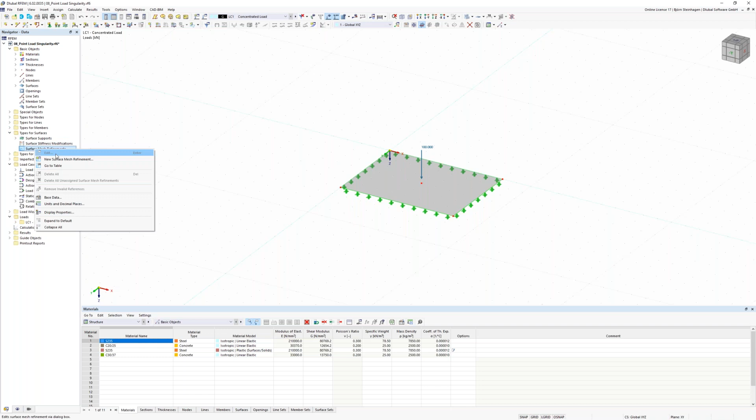Similarly to our first example, we want to look at the effect of different mesh sizes on our results. In the first example we went to types for surfaces, surface mesh refinements, and clicked on new surface mesh refinement, which took some time. There's an even quicker way to do that in RFEM, using these tables at the bottom. Everyone quite enjoys using the tables, so I thought I'd show that here. In the structure, we can go quickly to types for surfaces, where we have the different types, and we want surface mesh refinements of 2, 1, 0.5, and 0.25. Much quicker than the previous method.

We want to also assign it to surfaces, and previously each time we clicked on, let's select the surface it's applied to, but there's a quicker way. Just like the previous example, we want 4 surfaces, so we select the whole first surface we've defined. We want to create a copy, 3 copies. For the displacement vector, since I didn't know how wide this surface was, I go from there to there - it's picked up that that's 8 meters. However, I want a 1 meter gap between these copies, so I change that displacement vector to 9. I click OK, and there we have our four surfaces.

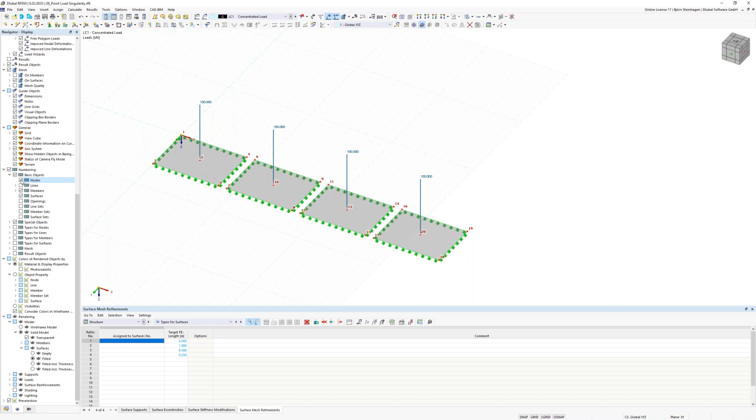Now what we can do is, well, because this is a very small model, I know that that's surface number 1, surface number 2, 3, and 4. If you want to see that graphically, we can go under numbering. It's now numbered everything, including the nodes. That's confusing me a little bit, so I switch nodes off. And now I can see the numbers of the surfaces.

The loads are also in the way, so if I just switch that off, there we go, 1, 2, 3, and 4. And that's exactly the order that I want. So I'll just go 1, 2, 3, and 4. And we have the mesh settings now applied to the surfaces. If we want to see that, we can click on Generate Mesh. And we can see the mesh for the different surfaces.

One thing to note is, going back to what I mentioned in the beginning, the importance of node placement. The surface is meshed according to these nodes. You'll see that in each case, a mesh goes through that node that we created in the center. Right, so we have our surface mesh refinements applied to our 4 different surfaces.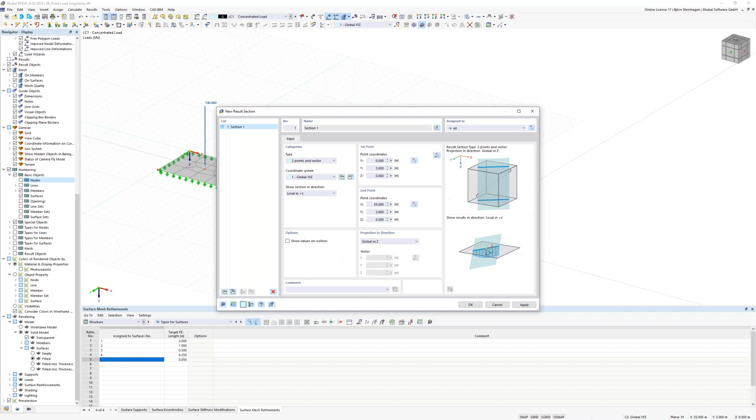We want to also create a results section similar to what we did in the first example, so we can have a look at what the moments are like. So if I do that, create a results section, click on OK. Yeah, I think we can calculate all now. Cool. I don't need the design situation, so I'll just delete those for now. Right. So again, default is our global deformations. I would like to have a look at our bending moments.

So just on the results section, you can see that it only shows 1 value. And if I look at the settings now for results section, it's showing the global extremes. So in our global model, what is the extreme? I don't want that. I want local extremes, so for each surface. So if I toggle that, there we go. We get the results for each surface. These are looking at our displacements. As I mentioned, I want to have a look at the bending moments.

So we see we have 4 identical situations, the only difference being the mesh size. And we can see we're going from a coarse mesh to a fine mesh, and we're going from a bending moment of 37, and it's getting increasingly higher. And this is the thing with the singularity. If you make the mesh finer, it doesn't necessarily improve the result, or the result isn't actually valid anymore.

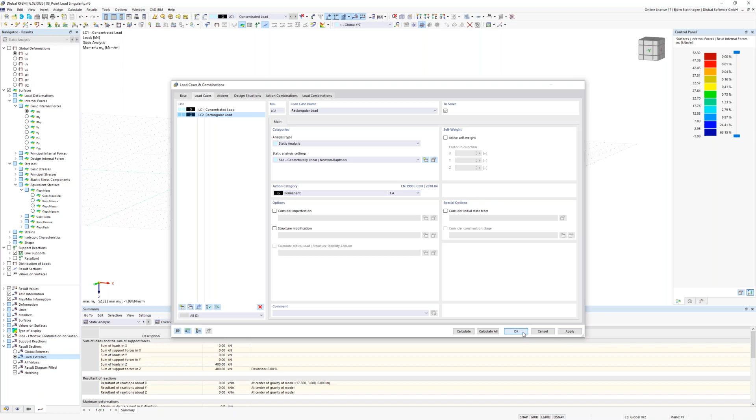I copied the load case, which means that the nodal loads have been copied across. So if I toggle between concentrated load and rectangular load, the loads are still there. So now that we're in the rectangular load case, let me remove that. And we want to go under new free rectangular load.

The nice thing about this is that we don't need to manually mesh our structure or model a small rectangle which represents the size of where the loading is being applied, which sometimes one has to do depending on the ease of use of the software. But with RFEM, it's very simple.

We have these options. We already know the center of our loads, because we've got those nodes, and we can also give it a certain area over which the load acts. So hypothetically, let's say that our load acts over a rectangular area of 0.5 by 0.5. We need to keep everything the same because we're comparing between the concentrated load and now a solution for the singularity. So 0.5 times 0.5 gives us 0.25, and we want the equivalent of 100 kilonewtons.

So this will need to be 400 kilonewtons per meter squared. If we take 400 and multiply that by 0.25, we come back to the 100 kilonewtons. So we're just making sure we're comparing apples with apples in each load case.

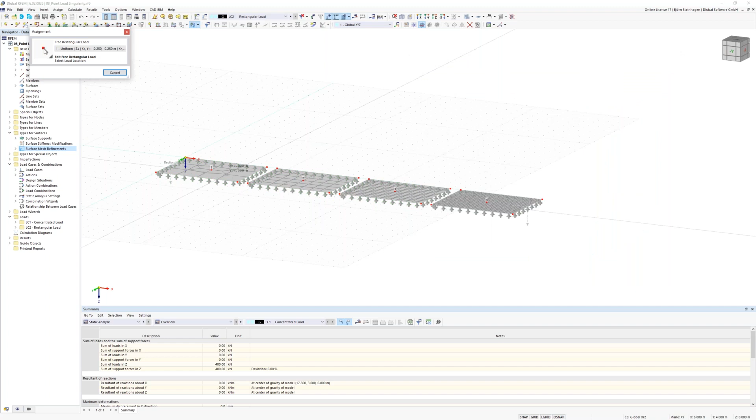So for here, the center is node 1. It is assigned to surface number 1 as well, but RFEM is clever. It knows the interconnectivity. So if I click on the drop down, it tells me that it can be applied to surface number 1. Click on apply and next. For this one, it is on that node, and it is assigned to surface 2. Apply and next.

Just bear with me there. This is a bit of manual work. That's applied to surface number 3, and this one applied to surface number 4. Apply, next. Good. So now we have a workaround for avoiding the singularities in our model.

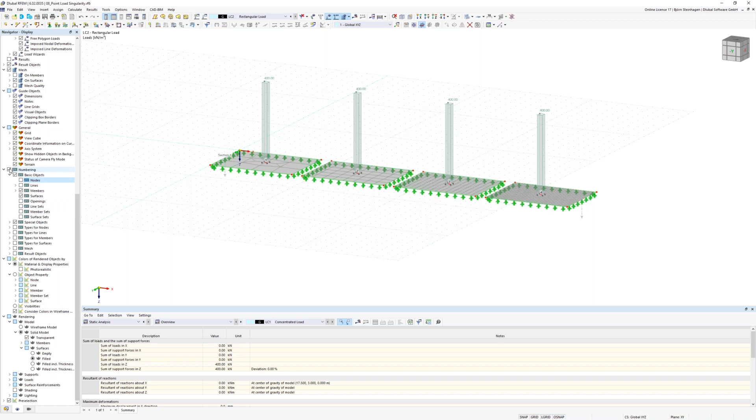If I go back to my visibility settings, I don't want to see the numbering anymore. And now we can run this model. So if I calculate all, again, we're looking at deformations. So if I switch to, oh no, we're looking at moments. Yeah, it's exactly what I wanted.

So with the concentrated load, we see a finer mesh starts to approach, we can say, infinity, because there's no knowing where this will stop. So a finer mesh is not helping us out. What we've done is we've basically got the exact same load, but we've cast it over a realistic surface area over which the load will act. And we see we have much more stable results.

A finer mesh is actually resulting in a smaller bending moment, which is interesting, because when looking at the concentrated load, one might get a bit of a shock and think, oh wow, there's a hidden monster in this result, and the finer I make my mesh, the higher the result. But that might not actually be the case, because if we, through engineering judgment, make the model more realistic, we see that we actually have a refinement of the bending moment.

So that is an example of load singularity using a nodal load. Going back to this results section, if I go back to our concentrated load, say you have defined the model in this way and you want to now interpret the results, and you maybe don't want to transform the nodal loads into an area load, one has an option under the results diagram. We can see what we had here, this increasing bending moment.

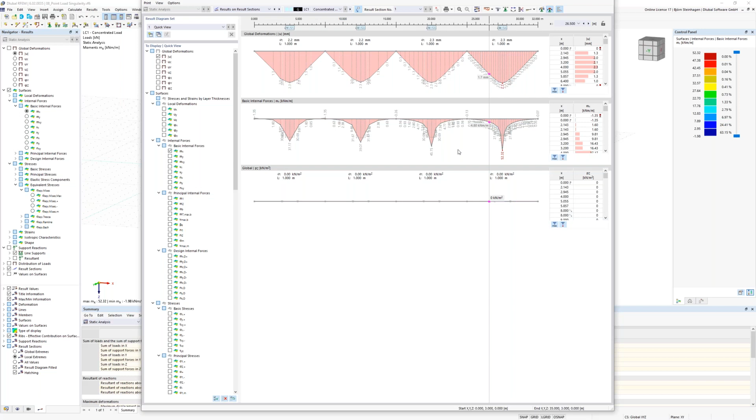So that's an alternative to transforming your nodal loads into a rectangular load. You can have a look a bit deeper into what the results diagram is telling you. Obviously, you can't smooth a valid result. So if it's a real high stress, you can't just ignore it. But in this case, because we have a singularity, we can, with good reason, validate or smooth it out.

I think that is enough on point loads. I think we can do pretty much the same, but the inverse, and that is with a singularity associated with a nodal load, a nodal support reaction. So we run through these similar steps. We call this, just waiting for it to open, there we go.

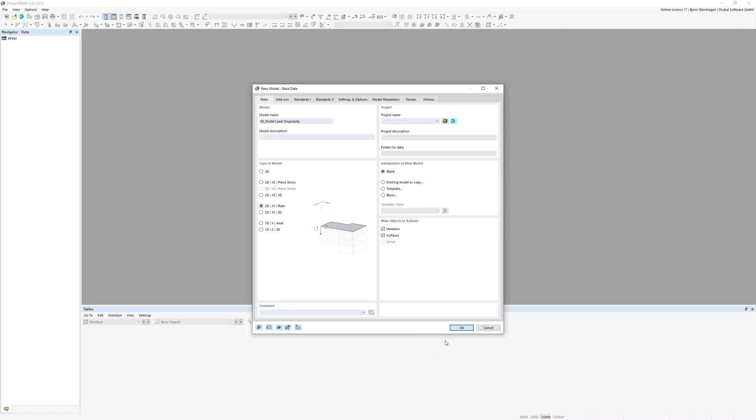Nodal load singularity. Again, we're looking at the 2D XY plate. We click on OK. So we're going to do the same thing, and we're going to have 4 surfaces. Again, I want a 200 millimeter thick concrete section or surface, so 200 thick.

We can go back to our concrete, which is C30/37, normal grade concrete from Europe. So C30/37, 200 thick. Click on OK. OK again, and we're ready to draw. I like always flipping to my XY plane, and we make it 8x4, I think.

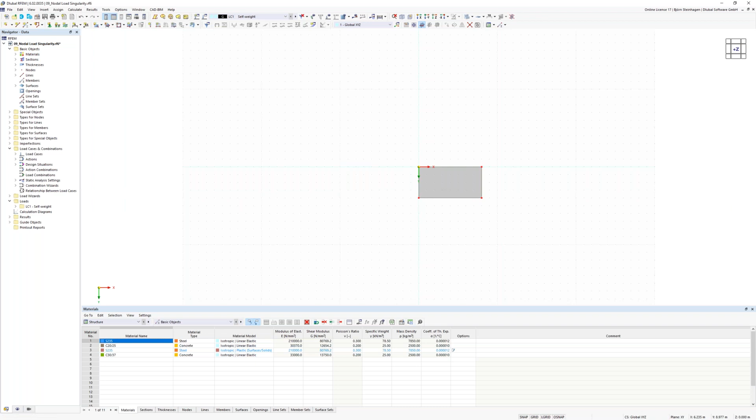Exit the draw mode, and now we have a line support at this end, which is hinged. We click on OK, and we want to have a nodal support in the middle, which might be a bit odd, but we just want to illustrate the effects of these singularities. So create the node first, and then assign it a support condition. So there we have it.

Again, because self-weight is default when opening a new model, we will deactivate self-weight. And then we will create a surface load of 10 kPa or kilonewtons per meter squared. Obviously, the surface load needs to be assigned to a surface, and we can do that there. And there we have our model.

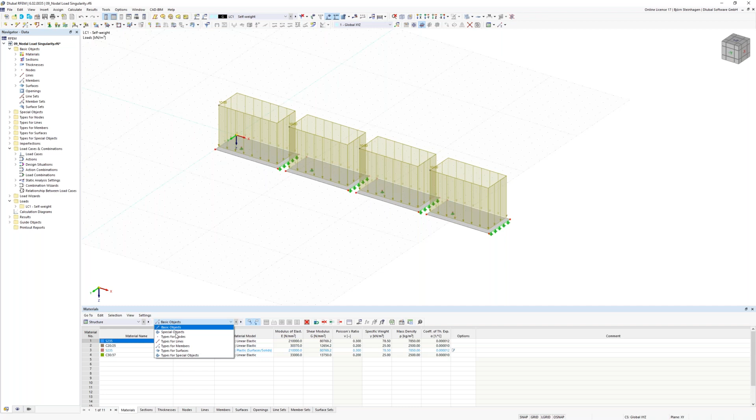We're going to do the same thing as previously, so selecting all elements, copying, creating 3 copies. I think displacement vector should be 9. Yep. And what we want to do again is create the different mesh sizes. So types of surfaces, surface mesh refinements, we want 2, 1, 0.5, and 0.1. That will be applied to surfaces 1, 2, 3, and 4, and everything is done.

Let's create a results section again. And we click on OK. We now have a results section, and we can calculate all. Again, looking at our moments. Again, we're only seeing the global peak. So let's go under results section to look at all local extremes.

Similar to the previous example, we have a mesh refinement leading to almost an exponential increase in our results. Again, this is quite clearly a singularity. So the question is, we might have a surface element being supported by a column underneath. A column is a 1D beam element, so when you model the beam, you will have a single node going into your surface.

So it might be quite hard to avoid this situation, but there are tricks that we can employ to get around that. For the finite element method, we reduce things to a single line for a beam or a planar surface for a plate, but they still have other properties which we want to consider. So for this example, let's say that this isn't just a point nodal support, but a column sitting underneath our model.

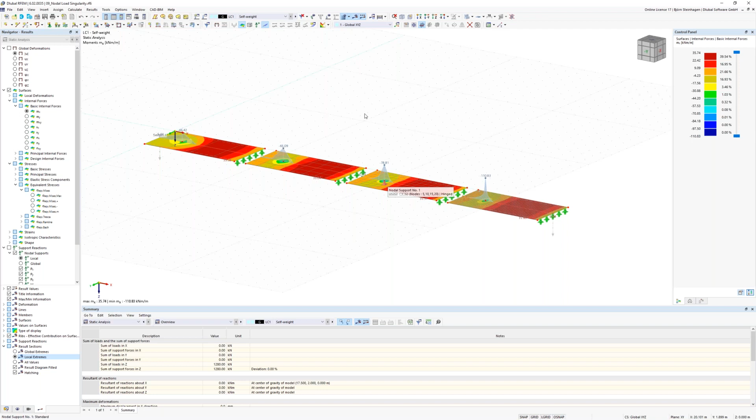So what we can do is adjust the properties of this nodal support. If we go under edit nodal support, we have this stiffness via fictitious column, which is quite handy. We'll get this new tab, and we'll say elastic surface foundations. There are many different options, but I quite like this one. It's really bringing a practical, real-world example as a diagram.

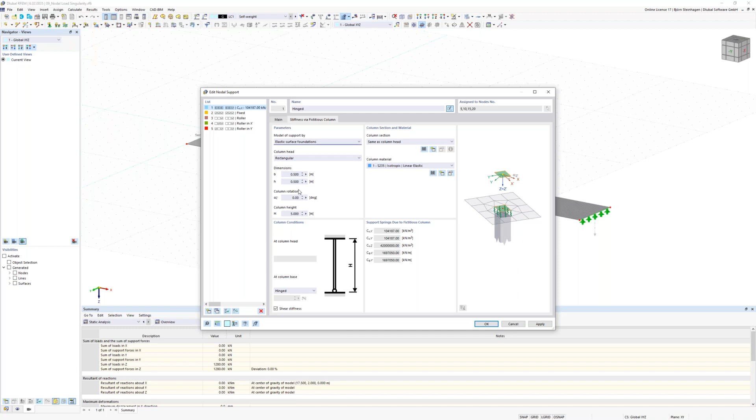You can see there's a column that's supporting the nodal load, which is what Ismail was saying as well. This user friendliness is quite enjoyable when modeling. We have dimensions of the column head, breadth times height. We'll leave it at 0.5 by 0.5. Column height affects the stiffness contribution; a very short stubby column will be much stiffer than a very long slender column. So we'll leave that as 0.5 by 0.5, and we click on OK.

Yes, our conditions have changed. And we can see different nodal support attributes now. So if I display or generate the mesh again, we can see this 0.5 by 0.5, what we deem to be a physical representation of the support conditions. And now, sorry, I want to switch off these design situations because that makes the model run a little bit longer. And if I say calculate all,

we see now a difference. Whereas previously we had this peak of about 110, I think it was, hogging moment over this pin support, we now have a more realistic behavior of what will happen over the column head. So those are two examples when it comes to singularities, associated in these examples with point loads and point supports.

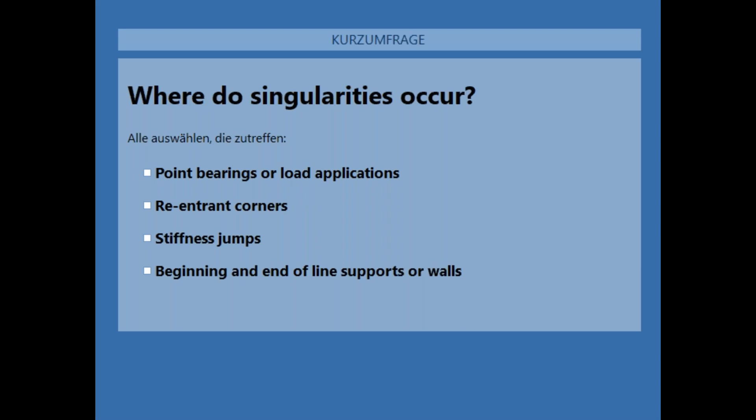That is all that we have in terms of the modeling side of things. I think I have one more poll. There we go. Let's start the poll. So the question is, where do singularities occur? And there are multiple answers possible. I'll wait just a bit so everyone can have an opportunity to answer. All right, I'll close the poll and show the results. Yeah, so all of these options are locations where singularities can occur. Cool. I'll close that and jump back to the presentation.

That is it in terms of the modeling side and the introduction to FEM. I think just a few more comments from our side. We've touched on it quite a few times. Ismail and I have both introduced ourselves. We are also both students. I remember I actually applied to be a VAC student at Dlubal after a similar webinar to this about a year and a half ago, and Ismail was also sitting on the panel there. And also I was in that webinar, yeah. I was so impressed that I wanted to get involved. Well, we are glad you're with us today, Björn. And yeah, we hope we'll see some of you guys working with us someday.